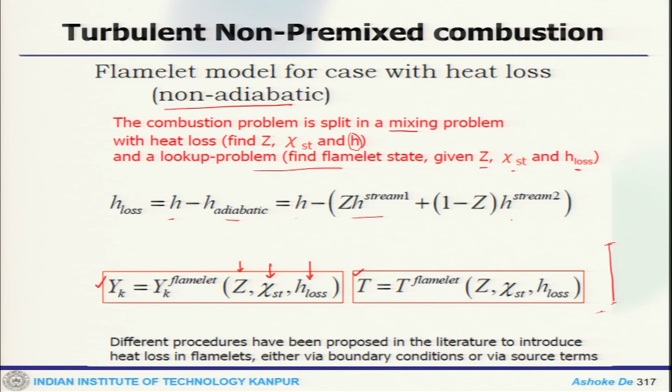Welcome back. Let's continue the discussion of the Flamelet equation for non-premixed combustion. We've looked at the adiabatic and non-adiabatic systems, and now we are looking at how we can model this Flamelet equation. We had looked at the non-adiabatic and adiabatic systems, and now we look at what happens under turbulent conditions, where mixture fraction and stoichiometric scalar dissipation rate are fluctuating.

So you need to define the PDF, or probability density function, of Z and chi st. Once you define that, you need the joint probability density function — this is again the Favre averaged terminology. Then you can find out the mean species mass fraction using integrals from 0 to 1 and 0 to infinity.

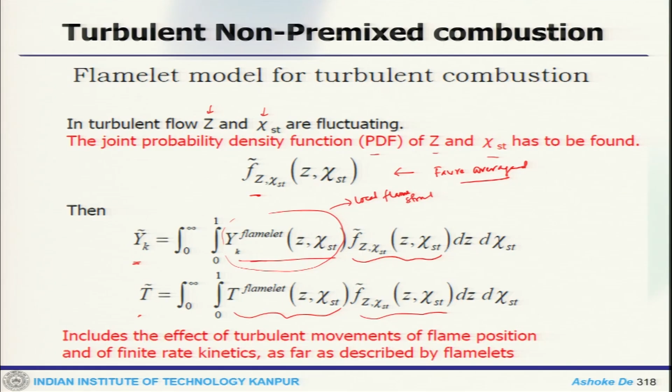This is the mass fraction variable, which is a local flame structure, along with the probability density function. Similarly, mean temperature can be found using the local variable of T and the PDF function. This includes the effect of turbulent movement, flame position, and finite rate kinetics, everything. That's how you obtain it from there.

Now if we assume a specific case where Z and chi st are statistically independent — as we've already seen in the statistical description of turbulence — this joint PDF function, which is a function of Z, can be written as individual functions, F(Z) and F(chi st). In that case, the calculation of the mean mass fraction or mean temperature can be modified.

This is again the local flame structure, and this gives you the density function for mixture fraction. This is the PDF function for the stoichiometric scalar dissipation rate.

The PDF of mixture fraction is assumed to be a beta function, and the PDF of scalar dissipation rate is assumed to be a delta function with no fluctuation — or it follows a log normal distribution. Sometimes in the literature this presumed PDF approach is also called the beta PDF approach. This is another terminology you may come across, because this is how you assume the shape of the PDF to find out the mean profile.

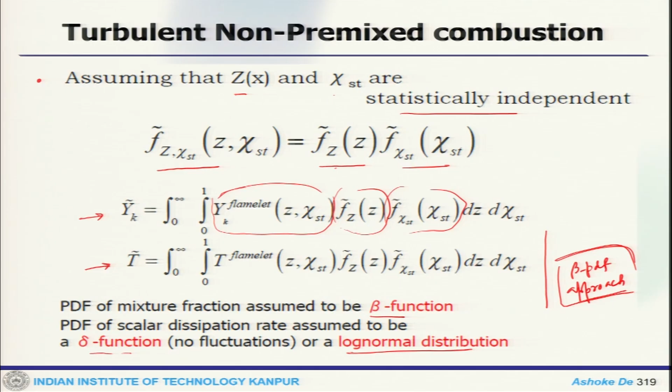Now for the scalar dissipation rate, if you look at the log normal distribution, this is how the probability density function of the stoichiometric scalar dissipation rate is written: 1 divided by stoichiometric sigma, exponential to the power of this term. Here the mean of the scalar dissipation rate would be exponential of mu plus sigma squared by 2, and the variance would be exponential in a similar form.

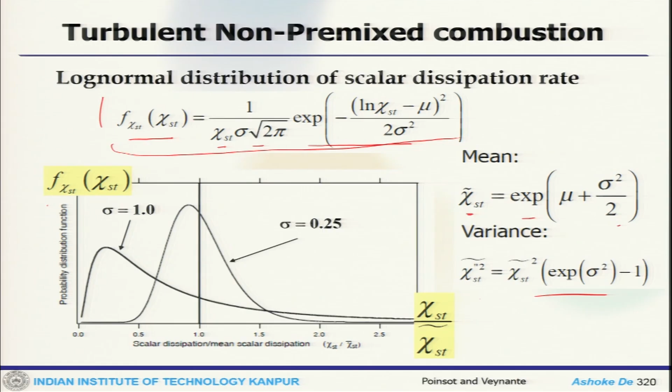If you look at the plot, this direction represents the PDF of the stoichiometric scalar dissipation rate, and this direction plots the stoichiometric value versus the mean — a sort of ratio. For different variances, sigma 1, sigma 0.25, you will see how this log normal distribution varies. This is an already assumed function, so a priori we know the probability distribution function, which is advantageous compared to solving the individual PDF transport equation, which is quite expensive in nature.

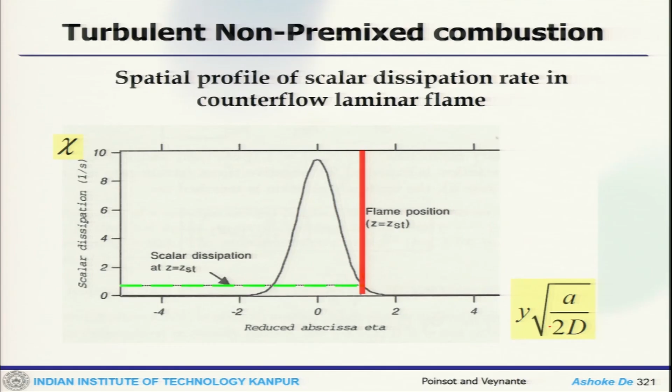Now if you look at the spatial profile of the scalar dissipation rate in a counterflow laminar flame, along Z and the reduced coordinate, this is how it moves. We've already seen this, so there's nothing new here.

Now, an important point is how we estimate the mean scalar dissipation rate at the flame position. We estimate the unconditional mean of scalar dissipation rate, which can be estimated as C phi times density times epsilon by k times mixture fraction variance. C phi is a model constant, and typically a value of 2 is used. This constant essentially accounts for the ratio of the time scale between flow and kinetics, with epsilon by k being the time scale of the turbulent structure.

So for a large or wide range of problems, this model constant of C phi equals 2 works nicely. But when you go to specific cases like hot coflow conditions, where auto-ignition is the primary dominant mechanism — where the flame is kinetically controlled rather than mixing controlled — this value may not work, and one has to tune it.

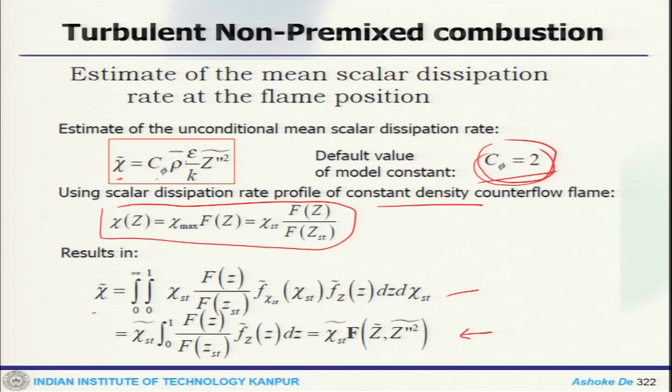Now, if you look at the scalar dissipation rate profile at constant density, this is how one can represent it, and this gives you the mean scalar dissipation rate in terms of an integral from 0 to 1. You can do the simplification and get it in this form. So essentially, if I put these things together, that's how you get the complete strained laminar flamelet model and how it works.

So all your species mass fraction, temperature - these are solved using detailed kinetics and the values are stored.

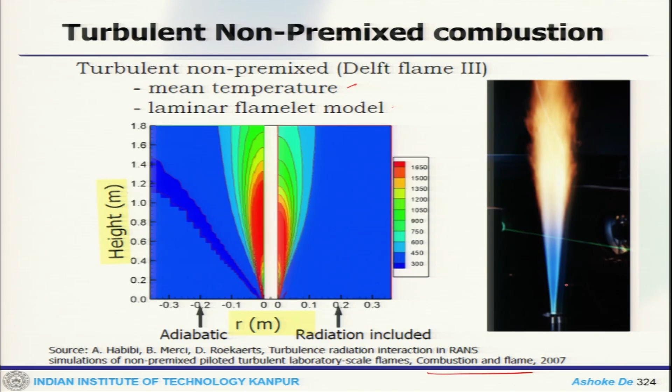So this is another example for the same, using this flamelet model, how we get the radial distribution of temperature. So there are some over-predictions because of the local extinction, because this temperature profile is over-predicted as the flamelet model does not take into account the local extinction.

Okay, so this gives you an idea. If you look at this literature, it will give you an idea of the different issues of the flamelet model and all these things.

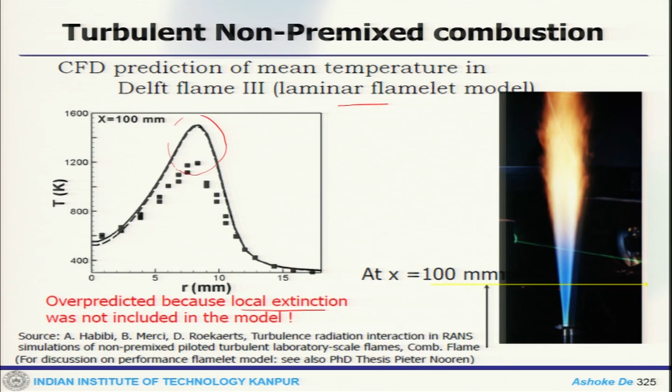So that's pretty much what you have in the flamelet zone, and if we put together what we have discussed - one is that flamelet models are based on completely flame normal analysis, which is absolutely important, because that's where if you have a local flame structure like this, and this is how along the normal direction

we do the calculation. Now flamelet equations provide the profiles as a function of mixture fraction for a cross section normal to the flame, but they rely on the diffusivity - the equal diffusivity assumption.

This is an important assumption. Now third, the laminar counterflow diffusion flame equation, which can provide the function of distance, profiles which are converted as a profile of mixture fraction.

Now importantly, turbulent flames in the limit of high Damköhler number can be described as a statistical ensemble of laminar flamelets. The probability density function of mixture fraction is determined from calculated mean and variance and assumed shape. So this is what is done to estimate the realistic situation.

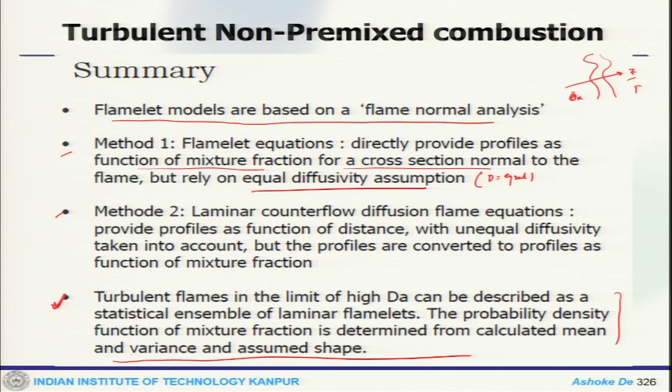Now we can look at some comparison of this flamelet model and the PDF model, which will give you what we have discussed so far under this non-premixed combustion. Everything will be qualitative and will give you a quick refresher of the whole thing we have talked about.

So first look at the strained laminar flamelet model - this is also known as the presumed PDF or beta PDF approach. Okay, so we have a RANS equation where the mean field is solved.

Then we have the turbulence equation where turbulence information comes into the picture. In the mean flow field equation we solve mixture fraction and its variance. Using that, and using the turbulence information also, we get the scalar dissipation rate, estimated as the mean scalar dissipation. From the mean scalar dissipation rate we get the stoichiometric scalar dissipation rate, which leads to the presumed shape of the probability distribution function.

Then similarly, using the mixture fraction and variance we get the presumed shape of the PDF for Z, and these two PDFs along with the local flame structure, which is a priori calculated, give us all the mean profiles. Finally, all these transport properties are sent back to the mean flow field equation to make the handshaking. That is what we do. It is very fast, computationally less demanding, and can be applied to a large scale of problems.

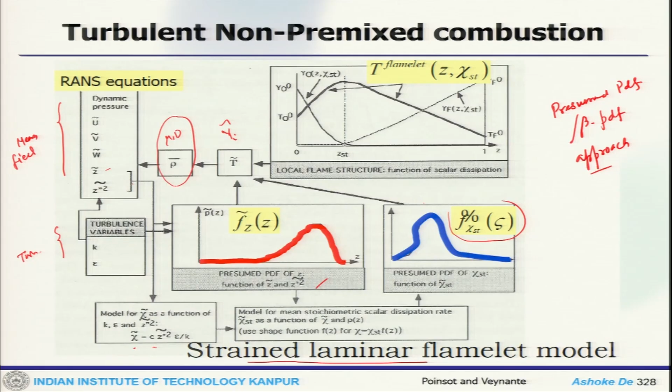Now this is the scalar PDF equation, meaning it is a transported PDF approach. Under that it is a composition PDF, or scalar PDF. Here we solve the transport equation for the probability density function or probability distribution function, and this is where it becomes a computationally expensive procedure.

We adopt a hybrid method, where we solve both Eulerian and Lagrangian. This is where we solve the mean flow field and turbulence also. These are the turbulent mean flow field calculations. Using the turbulence equation we get the turbulent frequency, which goes to estimate the micromixing model.

At the same time, mean flow field information is passed, turbulent frequency is passed, micromixing model is used, and we solve the Lagrangian equations in the Monte Carlo system, where turbulent frequency, mean flow field information, mixing model, reaction model, everything is input. There we solve individual particles, in the particle approach. Particle position, their reaction, mixing, and all these things are taken into account. From here we estimate density and other transport properties like viscosity, which are sent back to the mean flow field equation.

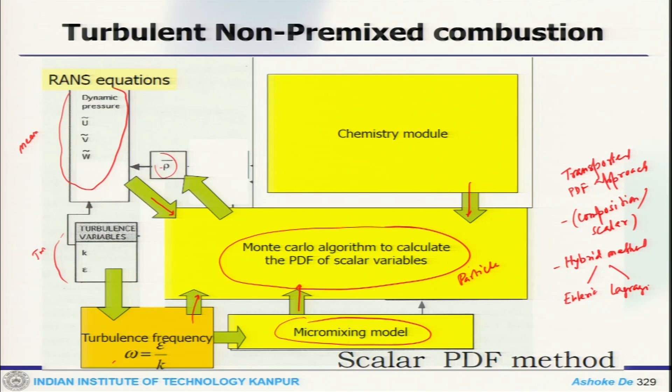If you look at the commonality between these approaches, whether transport PDF approach or presumed PDF approach, the mean density or other transport properties come out to be the parameters that do the bridging between the mean flow field and the local situation.

This is again a transported PDF approach, but now it is velocity scalar composition PDF, meaning you require joint PDF and all these things. The idea is similar: you solve the mean flow field, and here you solve specially RSM kind of equations, where individual Reynolds stress terms are solved, and also the dissipation, using which you get the turbulent frequency, passed for the micromixing model.

That information is fed, frequency is fed, mean flow field information and kinetics come in, then the Lagrangian solutions are obtained using the Monte Carlo technique, and finally density, viscosity, these parameters are fed back to the mean flow field equation, and we solve for that.

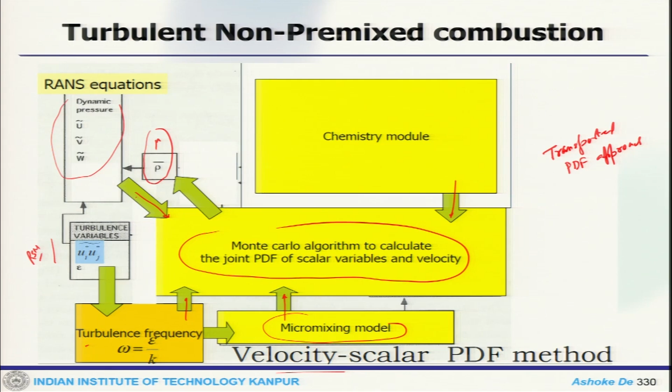Now if we look at these flamelet models and their issues, the problem is that equations for the mean quantities are unclosed. That is why the problem is split into two: one is the mixing problem, the mixture fraction, and a lookup table which is pre-calculated using the local flame structure, known as the flamelet, depending on the parameter scalar dissipation rate chi.

This is one of the problems handled in this way, making the process generic enough. Now the second problem is that turbulence can lead to the presence of a more general flame structure different from the pre-computed flamelet structure. One way to solve this is to extend the library for pre-computed structures with triple flames or with igniting and extinguishing flamelets, which allows you to go to certain limits.

Alternatively, one can introduce another scalar transport equation in terms of a flamelet progress variable, and take the source terms of the progress variable from the flamelet. This is the FGM, flamelet generated manifold, kind of approach. That means not only depending on the local value of mixture fraction and variance, you also solve for the flamelet progress variable, and using that information you can handle this kind of problem.

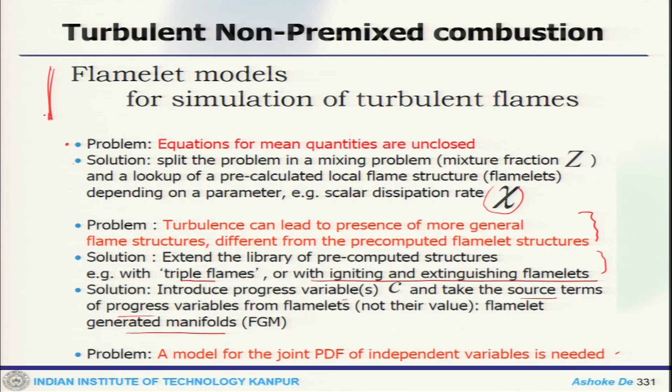Now a model for the joint PDF of independent variables is needed. This is another issue that one has. These are some of the problems one can think about while looking at this.

Similarly, if you go to the transported PDF approach or Monte Carlo based PDF method, one problem is that equations of the mean quantities are unclosed, but the chemical source term remains closed. Using the description of the probability density function, the source terms and other terms are closed.

Also, another problem is that the exact equation for the PDF is also unclosed, so we use some approximation and the mixing model to close that term, and the scalar dissipation rate, chi, appears in the mixing model. But the accuracy or fidelity of the mixing model can have a lot of impact in closing these terms.

That is another point here, because one has to look at what kind of mixing model, since we have already seen three different kinds of mixing models.

The third problem is that solving PDF equations by finite volume kind of methods is quite expensive, which is true, and that is why we go back to particle kind of situations or Monte Carlo kind of situations. That is one of the most efficient methods to solve it.

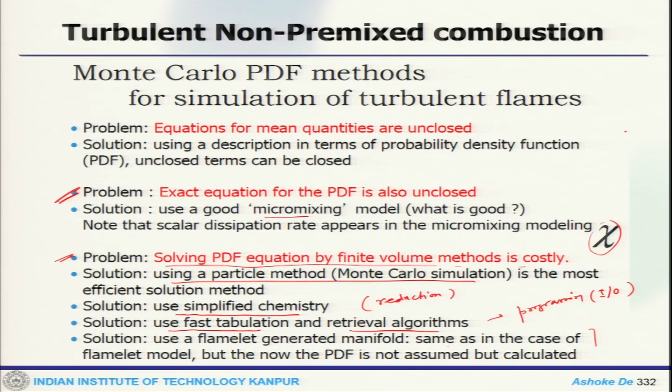So that is pretty much, if you look at this chart, we have pretty much covered all this discussion except this last one, which we are going to do now.

This is one of the advanced models, so you have to refer to the literature. There is another advanced model called MMC models. So CMC is conditional moment closure and this is multiple mapping closure, and we will give you an idea. We will do some discussion on CMC, and MMC we will do while talking about multi-phase flows a little bit.

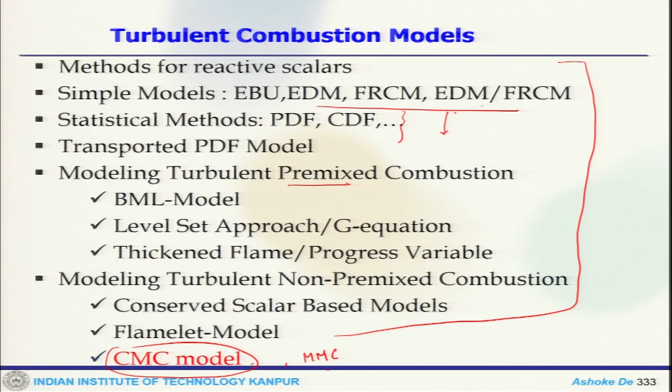That will give you how we started with the simple reaction models, then the issues we discussed, then moved to the statistical based models, then finally some models for premixed combustion, then we looked at non-premixed, and now we are going to look at this CMC one.

Now, for the instantaneous balance equations, we have to start from our basic set of equations which are continuity, Navier-Stokes, species mass fraction with the source term which we will get back to, and the enthalpy equation, meaning the total enthalpy which is chemical and thermal. So you get heat flux, heat source, and other terms.

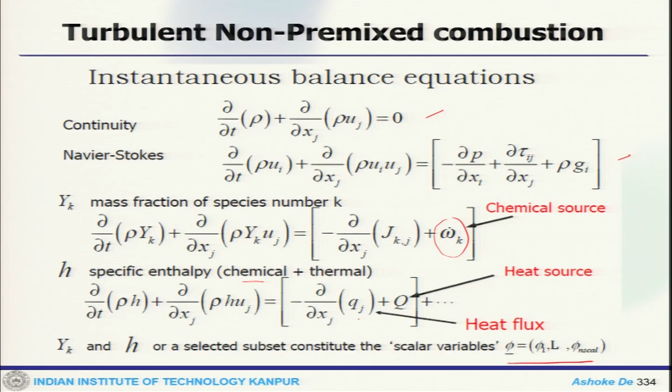So if you put this scalar variable, this would be a function of, I mean, it is a set of scalar variables which will include all the mass fractions and enthalpy.

Now again we need the definition of mixture fraction, so the fraction of the mass which is present locally, and we will get the mixture fraction transport equation. This is again free from the source term, the chemical source term, which is the biggest advantage of that.

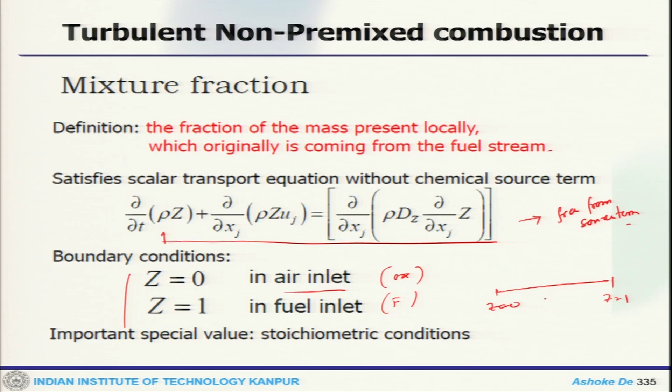And then you put the boundary condition, this is the oxidizer inlet and this is the fuel inlet, so Z is 0 and 1. Z will vary between 0 to 1, and the reactions take place along Z stoichiometric, right.

Now, we can see the different relationships, but that we will do in the next class. We will stop here today. Thank you.